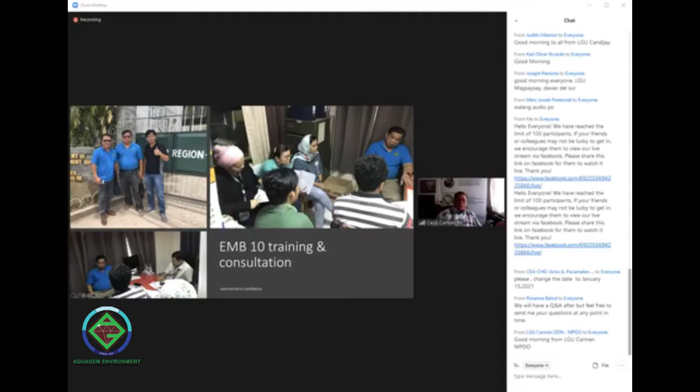Protection of Calapan River in Calapan City. Nandun kami sa Oriental Mindoro. Kumuha kami ng sample sa kanilang market na marumi at we were analyzing them. And this is the WQMA of Calapan River Water Quality Management Board, headed by Attorney Mike. Ito si Attorney Mike at ito si Catherine dito. So yun, isang proof.

Now, for the protection of waters of Panglao, my beloved province in the Philippines. So ito yun. The pristine beaches, we want to protect this. And I'm happy to share to you that tapos na yung kanilang NSSMP at meron na silang investor to put up a centralized wastewater treatment facility.

So I would like to greet a belated happy birthday to the Mayor of Panglao. Nag-celebrate siya ng kanyang kaarawan nung the other day.

Ito naman si Kagawad Noel Hormachuelos, ang chairman sa environment. Nagkaroon kami ng public consultation sa lahat ng barangay sa Panglao Municipality para maintindihan nila kung ano itong project natin. Well, what we are showing to you is our proof that we have been doing this work.

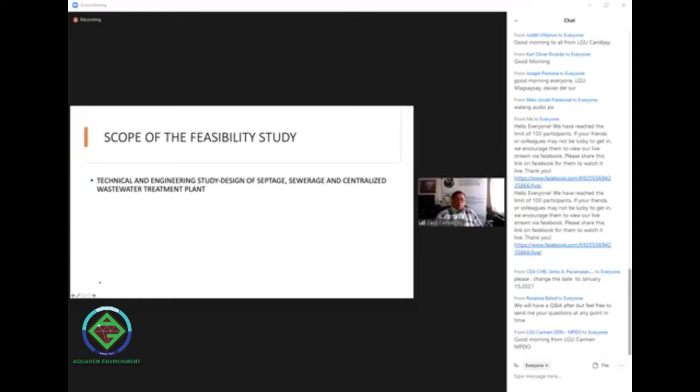What is the scope of this feasibility study, by the way? We deliver technical and engineering study. We design the septage, the sewerage, and centralized wastewater treatment plant. We conduct financial analysis. Siyempre, meron ka ng design, magkano ba yon? So we conduct financial analysis of the cost of septage, sewerage, and wastewater infrastructure, and also help in the sourcing of investors and funders. We conducted the environmental impact assessment of this.

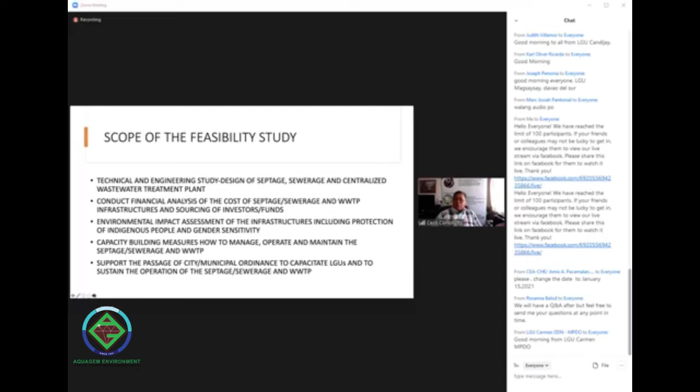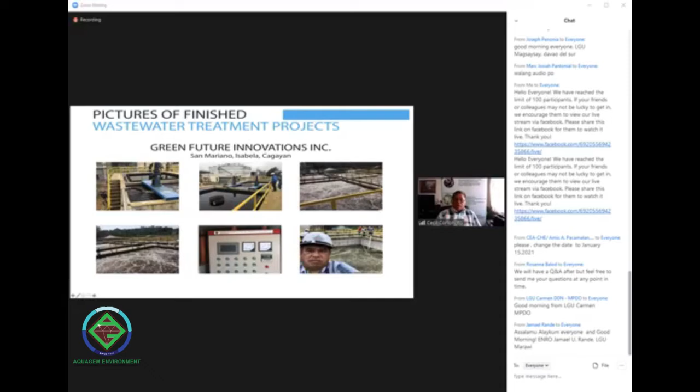And Aquagem design and build, at I would like to tell you, daming problema, but they have passed the standard of the DENR, yung bagong standard na pinafacilitate ng EMB Region 2. So these are small hospitals, cooperative hospital in Tagbilaran, Dampas. We also have hospitals in Cebu, yung Siman Hospital, and these are small wastewater treatment plants for hospitals.

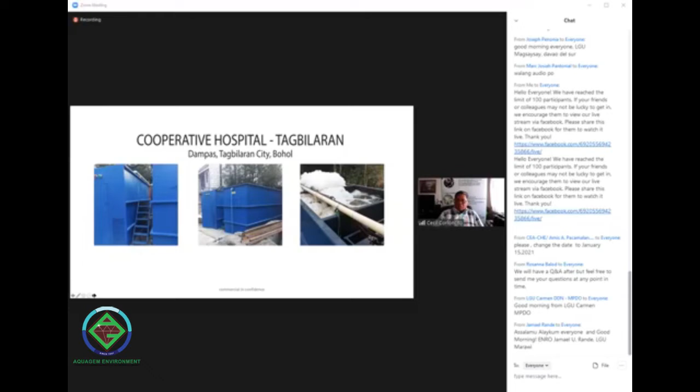So these are other places. We have also the slaughterhouse in the municipality of Guindulman in Bohol. We have also the Isabela United Doctors Medical Center, at ka-install na ngayon yung Tuguegarao, yung tinatawag na Cagayan United Doctors Medical Center, ka-install din namin sa hospital doon sa San Juan Tabuk. Kung saan-saan kami makarating to help hospitals. So those are pictures of finished product.

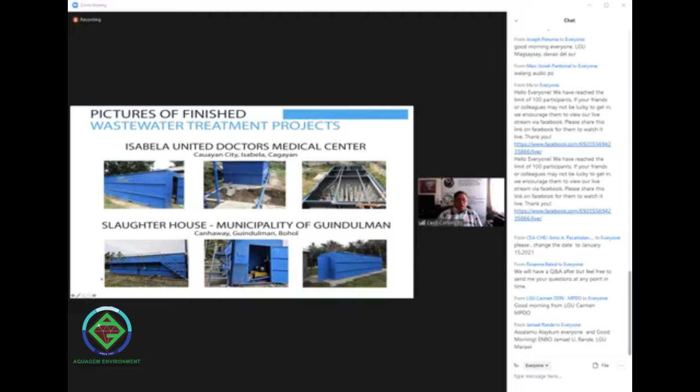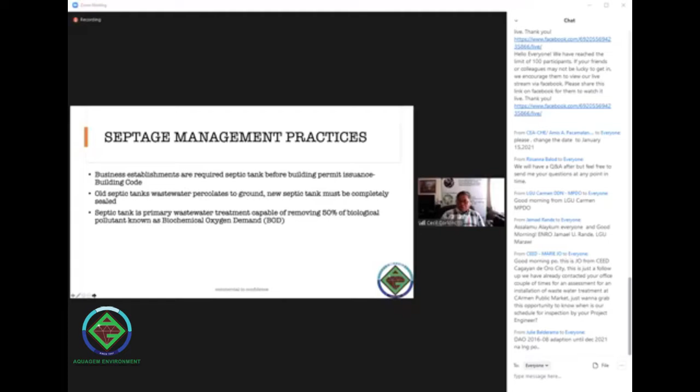Treatment facility yan, hindi yan storage ng waste. I will explain later on to you in layman's terms kung bakit mali yung pagkaisip ninyo na ang septic tank ay storage. Domestic wastewater has 300 ppm, or parts per million or milligrams per liter, of pollutants. Now, if domestic wastewater has 300 ppm, tapos i-dislodge daw yun every 5 years according to Water District Law, according to the Sanitation Code of the Philippines, Water Code requirements, that is to be dislodged every 5 years.

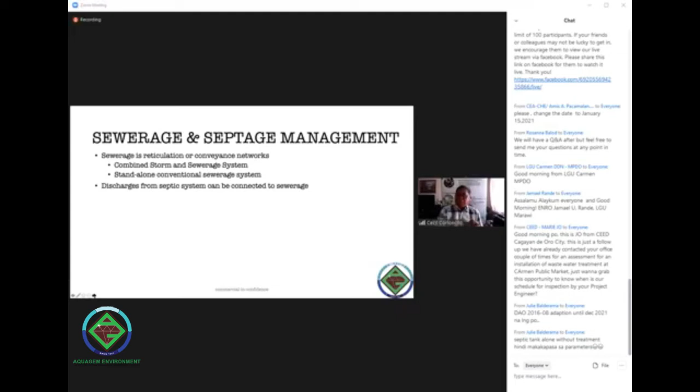Once it leaves the septic tank, that becomes the responsibility of EMB. I hope you can distinguish between the roles of LGU and EMB. EMB's responsibility starts when the septic tank is discharging - that's no longer a role for the LGU regarding discharge.

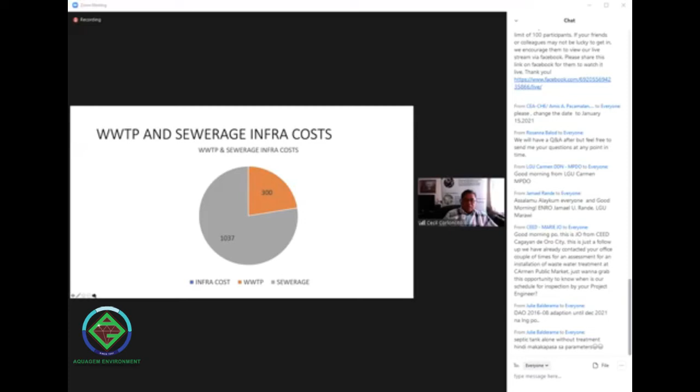Okay. Now, in Panglao, ito yung nangyayari. Ang wastewater and sewerage infrastructure cost. Grabe yung cost ng sewerage. 1 billion. 300 million lang ang wastewater. So this is being analyzed. So ang sewerage infrastructure is more expensive, and that is the reality.

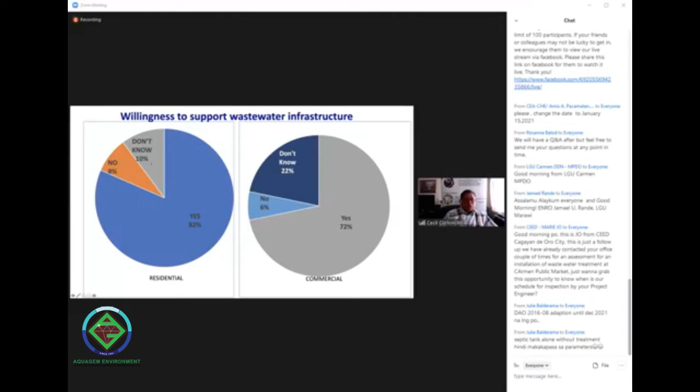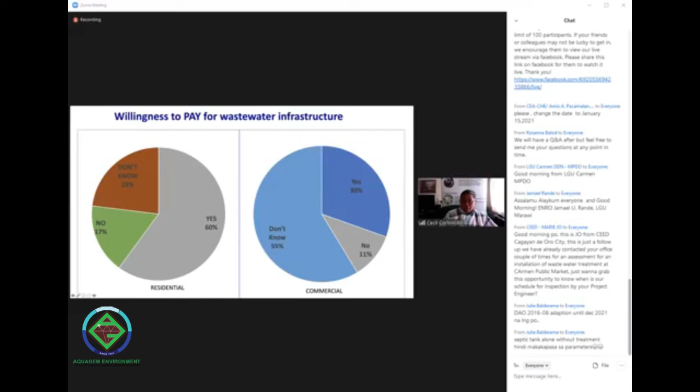So yung tinatabing willingness to pay, according to our survey, willingness to support wastewater infrastructure. Ang residential area, gusto nila, yes. Ang commercial, yes, majority din, they are willing to pay. Willingness to pay the wastewater infrastructure, sabi ng residential, yes. Pero ang industry, kung minsan matitigas ang ulo, ayaw na hindi na nila alam. Siguro gusto nila magtayo ng sarili at ayaw magbayad.

Now, I will give you an example. Buying sewage treatment plant versus connecting to STP. Case study. Ito 50 room. Ito yung the same room na in-example ko kanina. 100 person, 18 cubic meter. Ang daily fee ng pag-put up ng wastewater is 1,254.

Monthly fee is 37. Yearly fee 457, kalahating milyon to connect to a sewer. Okay? So kung nag-connect ka ng sewer, tapos ito yung billing system na ito, sa isang taon, itong hotel na ito, kailangan gagastos ng almost kalahating milyon para to put up, para to pay for connecting.

Buying an STP, pwede naman bumili siya dahil walang sewerage. 3 million ang karamihan ng treatment pa na mayroong 20 cubic meter per day. Ang OPEX niyan, kung ikumpara ito, is 1.7 years, mababawi na din niya ito kung bumili siya. So, ang break-even dito is 10.36 years kung bumili ka. Now, ang tanong ko kasi, bumili ka. Pag bumili ka ngayon, ang break-even mo 10.36 years.

So, with that, what will happen is that you can decide what to do with your decision of buying or connecting to a facility. Okay, so ito naman ang multi-criteria analysis natin para to piliin natin kung anong dapat na technology. The next presenter will be discussing about the different kinds of technology. So there are financial analysis also that we are doing. We can share you how to come up with financial analysis and of different technology. We can share we can really help you put up that.

So we'll go to the next one, which is the comparison of the different wastewater treatment technologies. And we have a very young expert who will be talking about this. She has a very diversified experience also on wastewater management in the Philippines and also in California. So I give you our young expert, Miss Naria Ilagan, a graduate also of the University of the Philippines and currently enrolled here in Australia.

Naria, let me unmute. We're just transferring the hosting to Engineer. Yeah, let me give the hosting to Naria. Hold on for a while. Naria, are you there? Yes, sir. I'm here. Let me give you the hosting for a while. Where is your name here? Yep. So while waiting, yeah. So you're now the host, Naria, take it away. Okay, so can everybody hear me? Yes. Yes, okay. So, yeah.

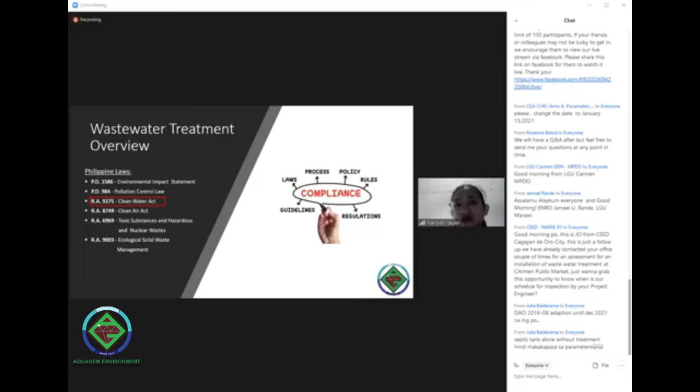So aside from being required by the law, I believe that it is our social and environmental responsibility to ensure that wastewater is properly treated. We all owe it to one another, as no man can survive without water. If we don't do our part, it will result in contamination of our water bodies, which could be toxic to aquatic life and human beings due to the degradation of its quality. Consequently, it could cause the spread of diseases, loss of biodiversity, and even climate change.

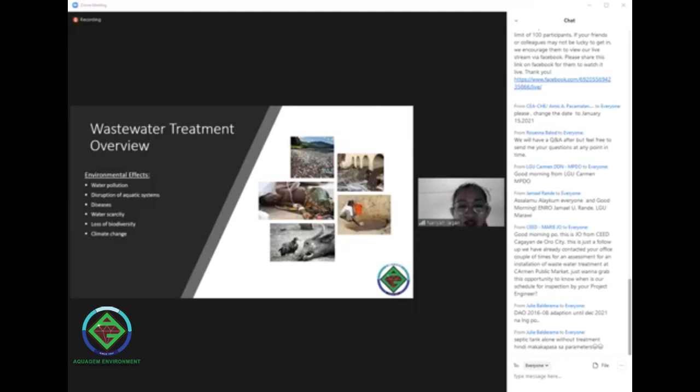So what happens when we treat wastewater? How do we do it, you might ask? Generally, there are 4 levels of treatment involved in a wastewater treatment plant. These are the preliminary treatment, the primary treatment, secondary treatment, and tertiary treatment. We will be discussing each in the following slides.

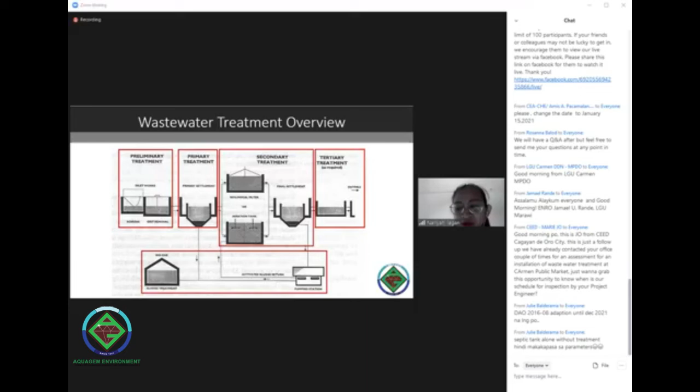Initially, wastewater, if domestic, will come from toilets, kitchens, and sinks. Coming from sewer lines, it will flow into the facility by initially passing through a screening process. Solid wastes such as rags and debris are removed through screens of various sizes, such as coarse screens, which cater to solids greater than 6 millimeters in size, and fine screens for solids less than 6 millimeters in size. Even the smaller particles like sand, gravel and hair are extracted in the grit removal. This is essential to not only ensure proper treatment, but also to protect the mechanical assets, mainly the pumps of the plant.

Afterwards, it will flow through an equalization tank. This could be an aerated tank wherein oxygen is supplied to facilitate mixing. Since the incoming wastewater may have different parameter levels, such as its pH, BOD, or the oxygen needed to naturally degrade pollutants, and COD, or the oxygen needed to chemically oxidize pollutants, among others, mixing is what is needed to homogenize its quality to meet the design specifications of the facility.

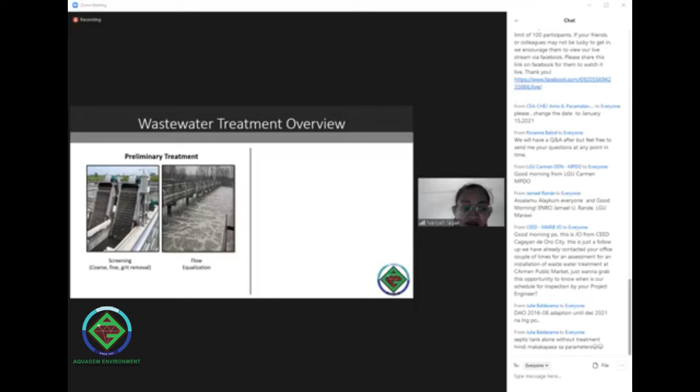Now, from the preliminary treatment, it will pass through a primary settling tank or sedimentation tank. This process slows down the flow of the wastewater to allow the organic solids or the raw sludge to settle by gravity. This process produces 2 products, namely the sludge and the wastewater. Usually, the tank is designed like a funnel, or embudo in Filipino, so that the settled sludge can be easily extracted from its bottom part and transferred into the sludge holding tank, while the wastewater flows through the weirs on top of the tank into the aeration tank.

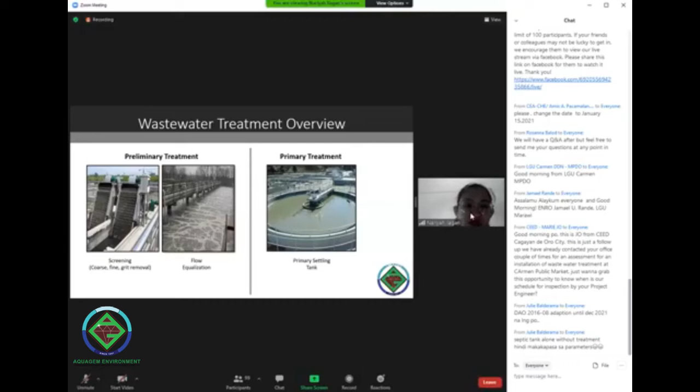So once the solids are removed, the wastewater will then flow to the secondary treatment. This is the heart of the process, as this is where the organic pollutants are eliminated and the wastewater is treated.

There are a great number of secondary treatment types, but for this presentation, we will be focusing on the biological aerobic treatment. So biological aerobic treatment entails the use of microorganisms which thrive in an oxygenated environment to remove organic pollutants. As you can see in the photo, the bubbles in the tank are from the injected air coming from blowers. So like us human beings, the microorganisms use oxygen to live and eat organic pollutants to survive. Actually, majority of our scope of work in operating a wastewater treatment facility is ensuring that the microorganisms are happy and satisfied.

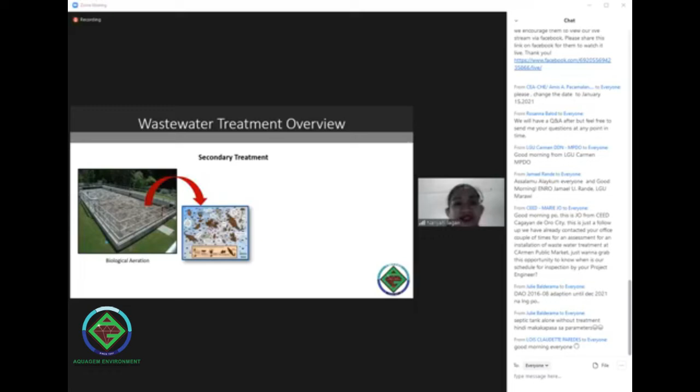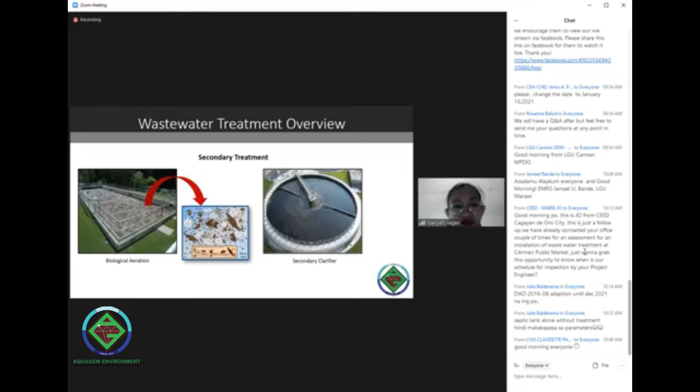So from the aeration tank, the treated wastewater will then flow through a secondary clarifier. It has the same purpose as the primary clarifier, but it separates the activated sludge, which contains inorganics, organics, and the microorganisms from the treated wastewater instead. So the activated sludge is allowed to settle again prior to transfer to the sludge holding tank, while the treated wastewater flows to the next process.

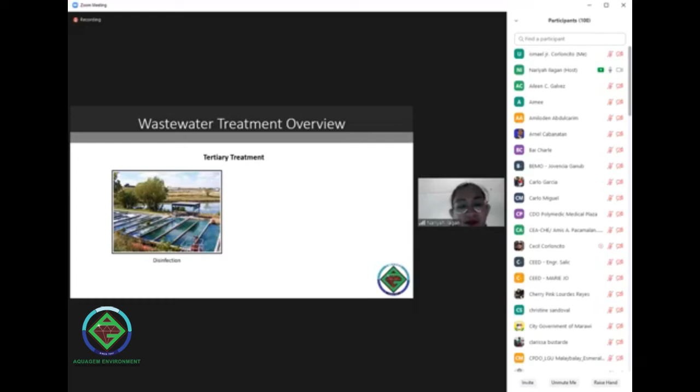Now, since there are two products from the secondary treatment, let us first discuss what happens to the treated wastewater. So once clarified, it goes through a disinfection tank where it is dosed with chlorine. As you can see in the photo, there are white dividers inside the tank. These are called baffles. They allow the treated wastewater to have at least 30 minutes of contact with chlorine prior to being discharged. This is necessary to have an effective disinfection against pathogens in the treated wastewater.

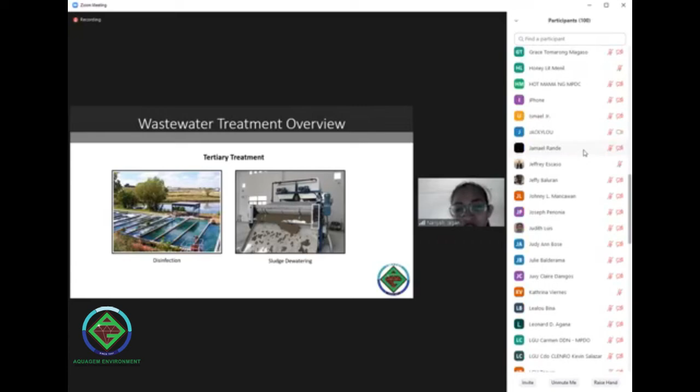On the other hand, the sludge from the primary and secondary clarifiers, which has accumulated in the sludge holding tank, is thickened. This is the process of decreasing its water content prior to dewatering. This can be achieved through the use of various equipment such as belt press, screw press, or a drying bed, among others. Dewatering is needed to yield biosolids, which are then hauled out and used as organic fertilizer.

Now that you have seen the overview, let us proceed to discussing the most common and widely used wastewater treatment technologies. So you will see that these technologies follow the same 4 treatment levels I have presented, but majority of their differences lie in the configuration of the biological aerobic tank. So we will be going through the 4 different technologies, starting with the conventional activated sludge.

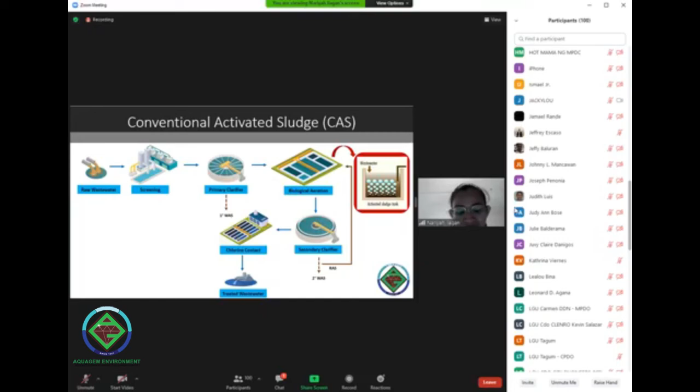Meanwhile, the sludge from the primary and secondary clarifiers, which we call WAS, or waste activated sludge, is removed. You will also see a return line, or RAS, short for return activated sludge, from the secondary clarifier back to the biological aeration tank, since there is a need to resupply microorganisms to ensure that they are enough for the treatment. These microorganisms also have a lifespan, that's why it is necessary to replenish their population.

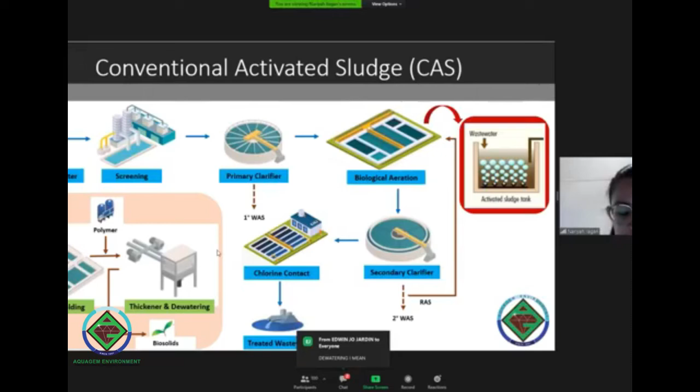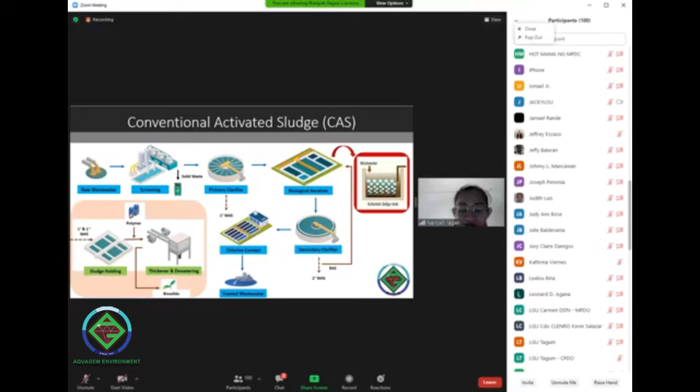The WAS, on the other hand, is then transferred into the sludge holding tank. Prior to dewatering, the WAS is conditioned with polymer for a more effective solid separation process. The separated and dewatered solids, known as biosolids, are then hauled out by a third-party contractor for use as fertilizer, as mentioned earlier. You will also see that the separated solid wastes from the screening processes are properly discarded following the requirements of RA 9003.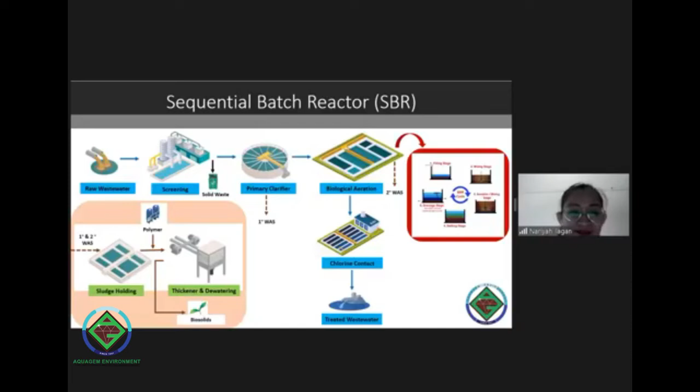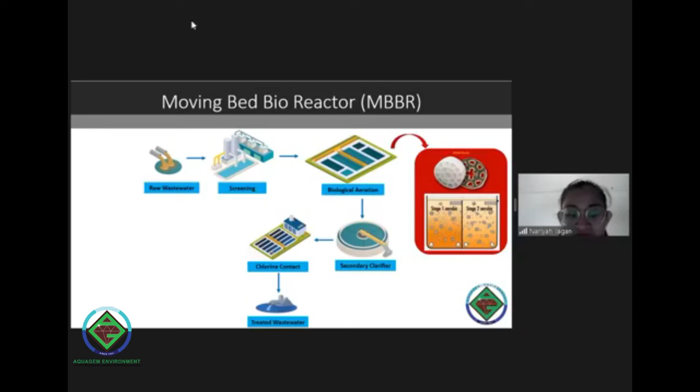If you will look at the red box on your screen, you will see that the white round media with divisions inside is where the microorganisms adhere to, like what you will see on the image behind it. More microorganisms can thrive due to the high surface area of the media. The increased volume of microorganisms allows for operation at higher suspended biomass while yielding increased solids removal, increased treatment capacity,

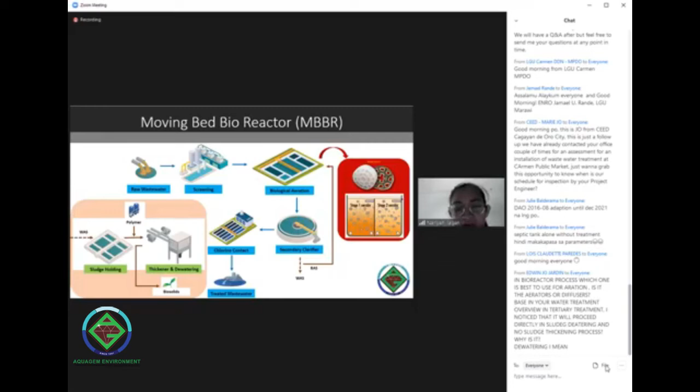and lower sludge production. Then, same as with CAS, there is also a RAS line from the secondary clarifier to repopulate the microorganism colony, as well as a WAS line, which then flows into the sludge handling processes to produce the biosolids for hauling. As always, the solid wastes from the screens are also discarded properly.

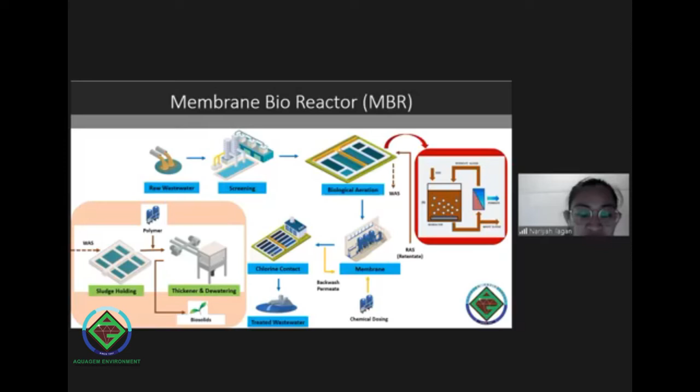Another distinct characteristic of the MBR is the need to periodically clean or revive the membrane since some of the removed particles adhere to the membranes and lessen the effectivity of its treatment. Finally, the solids from the screens are discharged as solid wastes. Because of the pore size and selectivity of the membranes, the MBR is capable of yielding the highest treated wastewater quality compared to the other three that we have previously discussed.

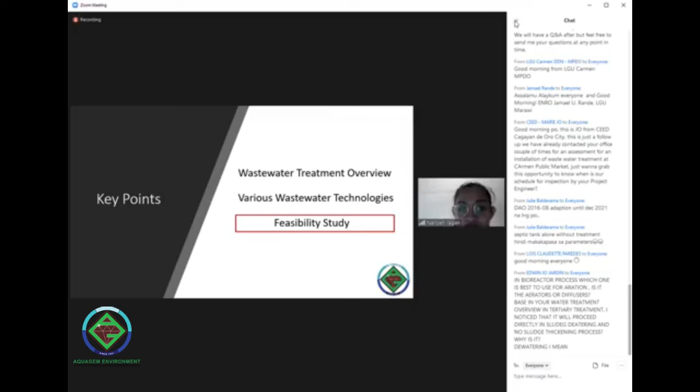Now, since you more or less have an understanding of the different wastewater treatment technologies, let me now show you the relevance to the feasibility study that Aquagem has conducted. So last August 2020, Aquagem conducted a study on the feasibility of constructing a centralized domestic and commercial wastewater treatment plant for Panglao Island in Bohol. Considering that it is surrounded by water and that tourism is a major economic driver of the island, ensuring proper wastewater treatment and protection of its waters becomes all the more necessary and important.

Of course, we don't want another Boracay incident with the improper untreated wastewater discharged directly into the ocean, possible spread of diseases, and possible closing of the island to happen. So the plant is projected to have a maximum capacity of 5 million liters per day, and Aquagem did a design for its phase 1 volume of 1 million liters per day, considering the CAS, SBR, MBBR, and MBR technologies.

So apart from those, another technology called the BioCleaner was also considered since we are always on the lookout for new, emerging, and innovative technologies currently available in the market. So what made us decide to even consider BioCleaner among all the other emerging technologies nowadays? Well, it has a simple and straightforward process. Same as with the others, raw wastewater enters the plant through a screening process.

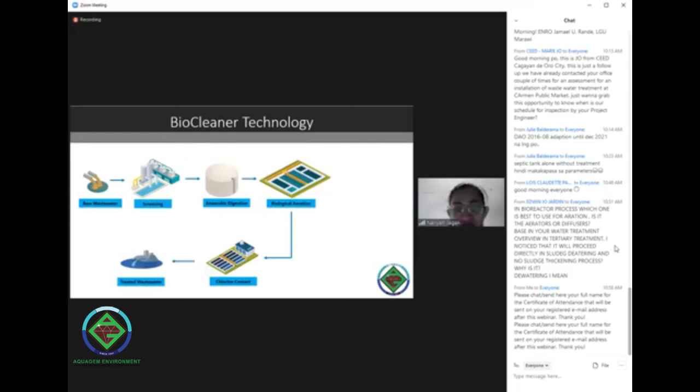One difference from the other technologies is that afterwards, it will flow through an anaerobic digester. Anaerobic means that there is no oxygen, either in molecular form or oxidized nitrogen species form, present in the tank. This is essential since there are special microorganisms in the BioCleaner technology that need this type of condition to thrive. After sufficient digestion, it will then flow through the biological aeration tank where BioCleaner technology is situated.

The BioCleaner is a plug-and-play technology. It utilizes saprobic bacteria that do not need intense oxygen dosing, thus eliminating the need for big blowers as it is capable of achieving more oxygen distribution while generating constant microbial growth. So I will let Sir Cecil discuss more about this since this is another topic that we will be presenting today. So same as with the others, after treatment with BioCleaner, the treated wastewater then flows through the chlorine contact tank prior to discharge as effluent.

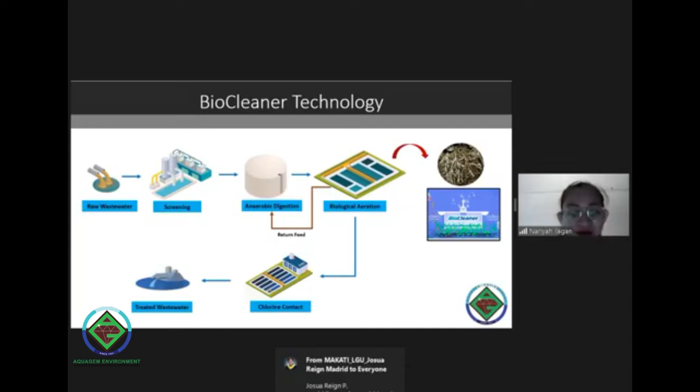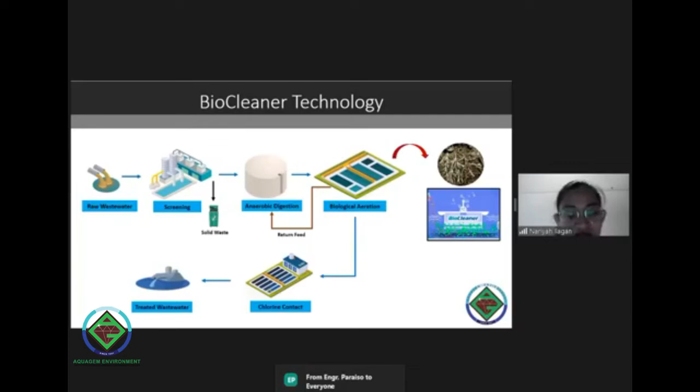Another major difference, aside from the elimination of big blowers, is that there are no WAS and RAS lines. Instead, we only have a return feed to the anaerobic digester to help propagate the microorganisms. But this removes the need for subsequent sludge handling and biosolids hauling, which have a significant operational cost reduction impact on the process. Then, same as before, there is still a need to manage the solid wastes from the screens.

As with any other feasibility study, Aquagem utilized a multi-criteria matrix to analyze the various technologies and help us impartially determine which one is best to use for the Panglao wastewater treatment plant. The performance of each technology in terms of its area requirement, ability to meet the new DAO 2016-08 effluent quality standards, energy and chemical consumptions, ease of operations, having at least 10 reference installations, being listed as a commonly accepted wastewater treatment technology in technical references, and stability of process were rated to evaluate how well they can meet the set standards for the Panglao wastewater treatment plant design.

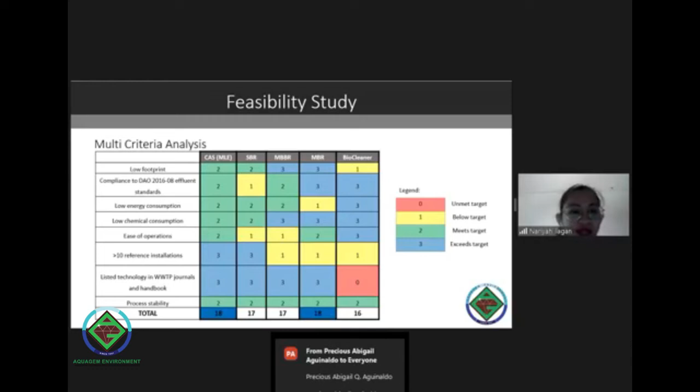As you can see, both CAS and MBR garnered the highest ratings based on the multi-criteria analysis, while the BioCleaner came in last due to not meeting the standards of being a listed technology in wastewater technical journals and handbooks, and also scoring low on footprint and reference installations. However, aside from the multi-criteria analysis, another important factor considered was the investment and operational cost implications of each technology.

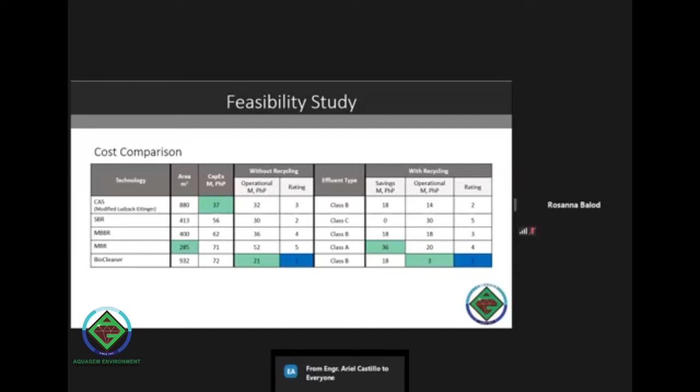In terms of area, you will see that the smallest land requirement would be for the MBR technology. However, it has the second highest capital expenditure needed, next to the BioCleaner technology, while the lowest will be for the CAS at 37 million pesos. Looking into the cost to operate each technology, you will see that, without a doubt, the smallest OPEX requirement would be for the BioCleaner technology, and that is without considering recycling yet.

If we factor in recycling based on the class of effluent after treatment with each type of technology, where Class A can be used as public water supply, Class B is for primary contact recreation such as swimming and bathing, and Class C is for boating, fishing, and irrigation, you will see that the highest savings would be for the MBR at 36 million pesos. However, if you consider the net OPEX after savings, BioCleaner still proves to deliver the lowest operational costs. So what does that mean?

Although the MBR and CAS technologies have scored high on the MCA and have notable advantages in area and savings and CapEx requirements, respectively, the results of the financial analysis show that the BioCleaner technology has the shortest ROI. Moreover, the Class A effluent quality that the MBR yields is too much for the Class B requirement of Panglao's surrounding waters. The overtreatment just translates to additional costs. Despite the high area and capital expenditure requirements of the BioCleaner technology, the savings from its annual operational costs compensate for the initial investment.

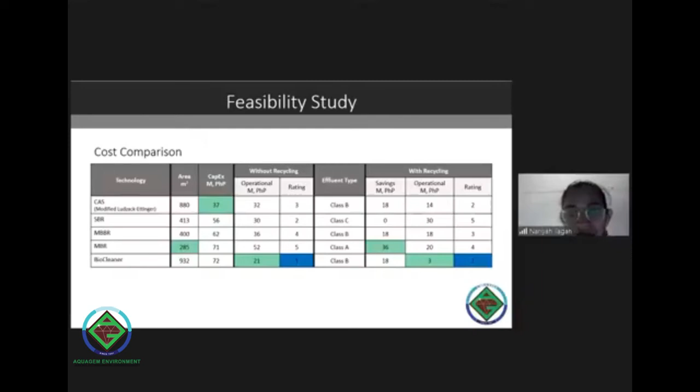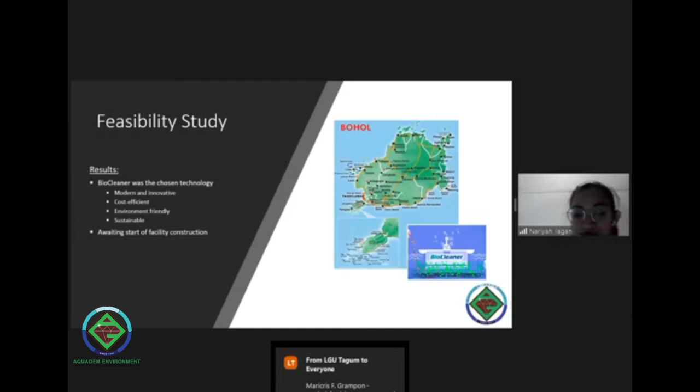Although it scored low on the MCA because of its absence in technical references, we cannot close our doors on utilizing emerging technologies today, especially with the advent of technological advances in our modern world. So in conclusion, Aquagem Environment's feasibility study showed that the BioCleaner technology is the most suitable technology for the Panglao wastewater treatment plant, since it is a modern, innovative, cost-effective, environment-friendly, and sustainable treatment solution which would not only benefit its residents but also the environment that we all share.

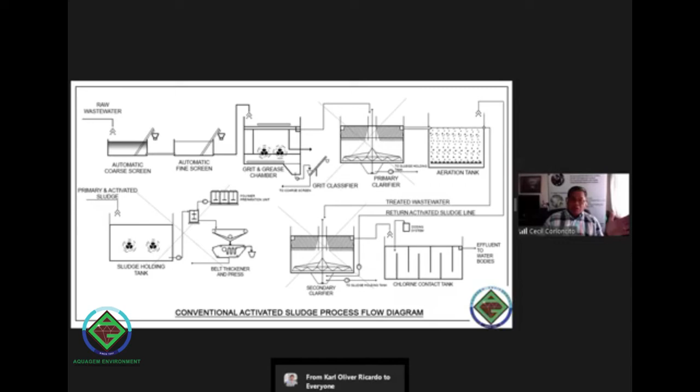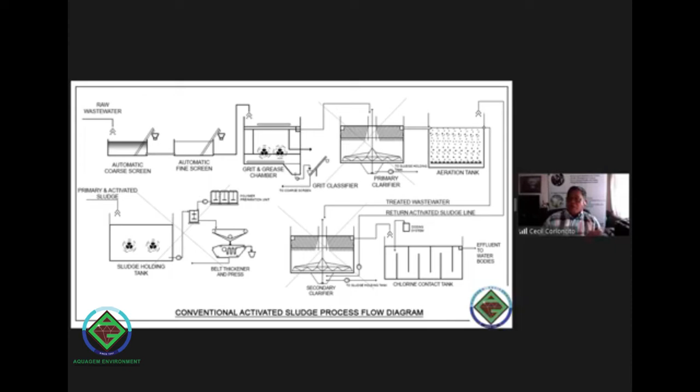That's the same way I felt last year when I was introduced to this technology. What, this will be removed? This will be replaced by biocleaner technology and this is what will happen to the process.

So the process flow diagram becomes simplified. Just two tanks, no more clarifier. It has an anaerobic tank and a biocleaner tank. And of course, there's still a chlorine contact tank and primary or preliminary treatment. So this is the simple process of the biocleaner technology we are introducing to you.

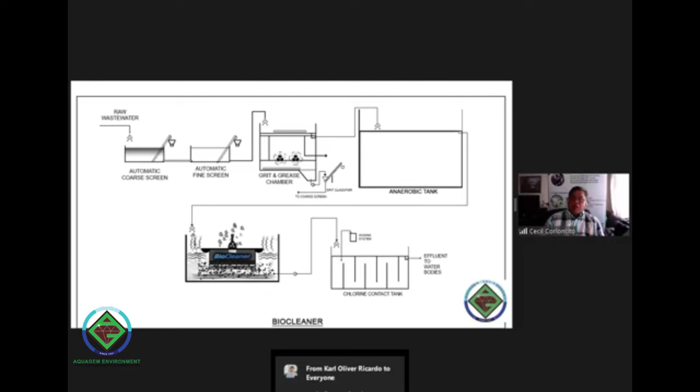Now, especially you engineers who know wastewater, if you have questions about this, I ask you to challenge us about this and I will answer your questions during the question and answer. So how does it look like?

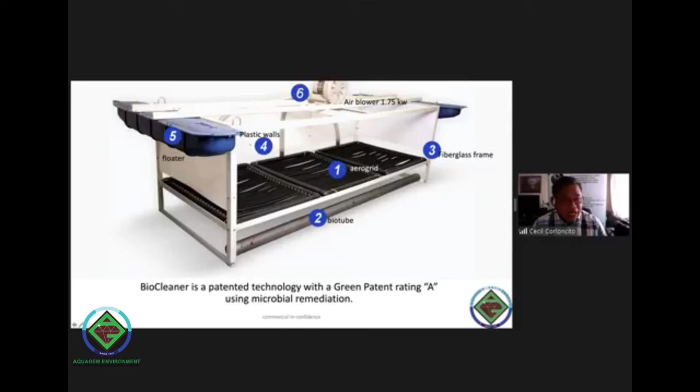So yung bacteria na yan will exponentially, take note of my description, exponential, hindi lang duplicate or triplicate. Exponential, walang tigil na pag-generate, manganak yung bacteria. And these microbes are proven to make the treatment more effective. And these are microbes that are considered in America biosafety level 1.

What do you mean by biosafety level 1? Siyempre, ang next question nyo, anong klase ng bacteria yan? Baka maputol ang kamay ko pag hinawakan ko ang wastewater, baka ako'y magkasakit dahil nandiyan ang wastewater. Biosafety level 1 means it's not dangerous to human being, it's not dangerous to a person, it's not dangerous to the environment, it's not dangerous to animals and plants.

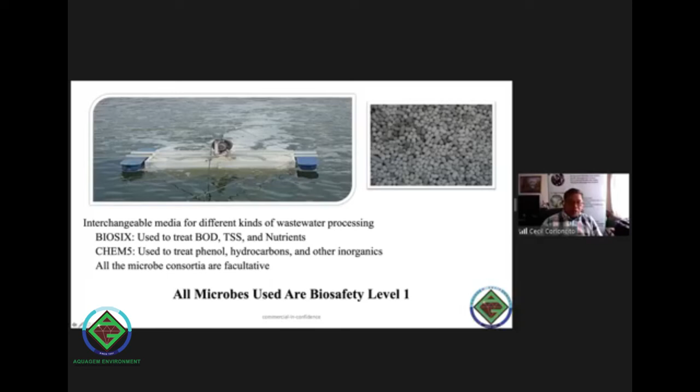So ang action lang ng laminar flow ang dahilan bakit ang bakterya makakahinga, maghanap siya ng paraan na huminga sa atmosphere, until yung bakterya ay nakakuha siya ng maraming oxygen, due to laminar flow, ang buong tangke ngayon ay masaturated ng bacteria filled with oxygen. Buhay na buhay yung bacteria na may oxygen at ready na siyang umatake ngayon sa mga waste. Kasi kung ang bacteria tulad ng tao, kung wala oxygen, hindi makahinga. Ang tao kung maglaro ng basketball, kahit gaano siya kagaling, wala siyang oxygen, lampas siya, hindi siya pwede.

Ang bacteria din, kung kahit gaano siya gustong kumain, wala siyang oxygen, hindi rin siya makahabol ng mga kanyang kakainin.

So the bacteria becomes active and generates a lot more bacteria, and whatever solids are generated, it will really consume all the solids. So that's the description of a laminar flow. The bacteria interface and the oxygen are getting closer, meaning there's more effective interaction between natural oxygen and the bacteria.

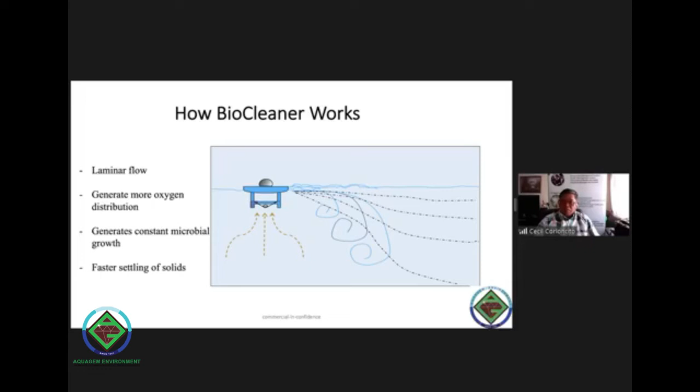Now, is this true? I'm telling you that big wastewater treatment plants in the world don't have blowers because they make the tank bigger, since they rely on the atmosphere for oxygen. Many treatment plants rely on the atmosphere. Now, this is how it works: the bacteria gets oxygen from the atmosphere and makes it more effective through the laminar flow process designed by the biocleaner. So how does it work?

The influent wastewater, our waste coming from our houses, industries, hotels, and various other sources, already has bacteria in it. Represented by this black negative, it already has bacteria. The bacteria from saprobic sources, represented by this green positive, this saprobic bacteria or biocleaner bacteria from the biotube, will outcompete the incoming bacteria, meaning they outcompete them in eating the food.

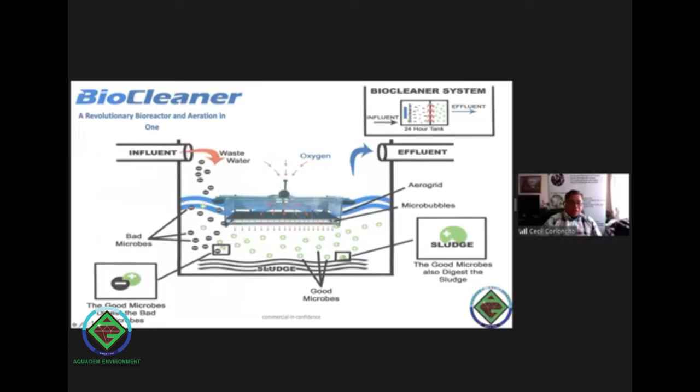To summarize, this has a smaller footprint or land use, flexibility in relocation since you can move it around, environmental independence, it can be placed in existing treatment facilities, and low maintenance cost. Of course, there's no more blower.

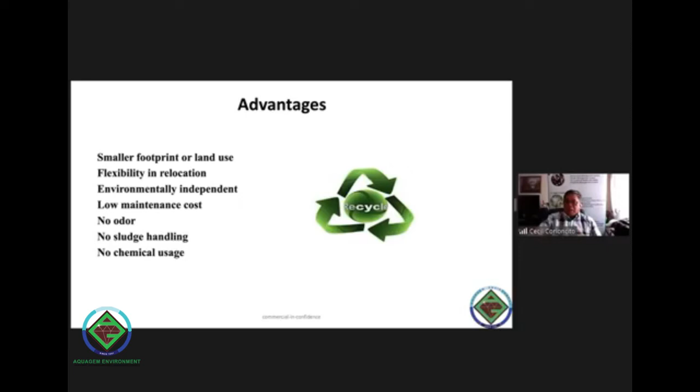There was a question earlier: do we need an odor control facility? And I answered that it depends on the technology, the situation, and the capacity of the plant. The saprobic bacteria, when they digest the waste, will also remove the odor. Unlike other technologies, like SBR, when the wastewater stagnates, it smells bad. The biocleaner technology does not need an odor control facility because the saprobic bacteria also digest the odor, the source of the smell. So of course, there's no sludge handling, no chemical usage, and that is the advantage of this technology.

To summarize the technical explanation of why there is low capex, capital expense: no need for clarifiers, no need for sludge dewatering equipment, no need for big blowers and air diffusers. Air diffusers are, if you're an expert in wastewater, one of the expensive parts of a wastewater treatment facility.

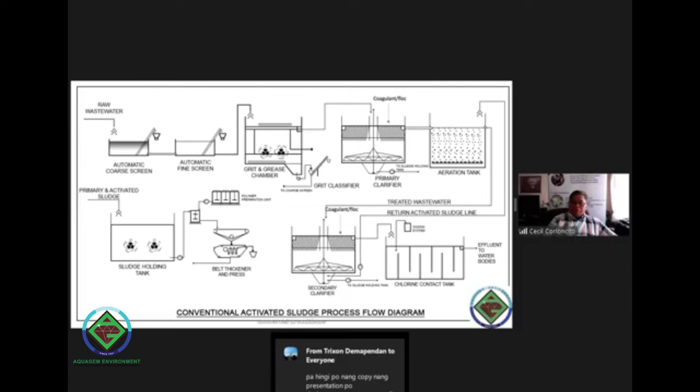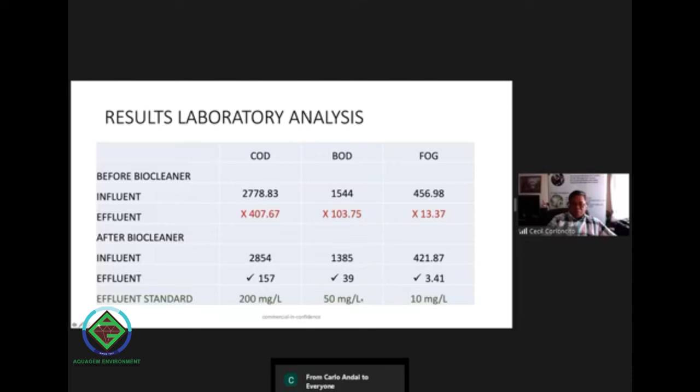95% reduction of chemical oxygen demand, 97% reduction of BOD, 99% reduction of oil and grease, 99% reduction of coliforms.